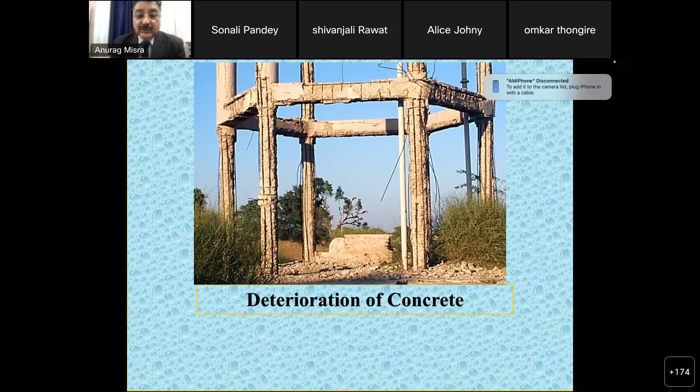We have not been able to attend to that, and that is the reason for the early deterioration of concrete. One more point I would like to highlight is that the examples I showed you here, when they were constructed, obviously there were several things missing, but as per the codal provisions, whatever requirements were prescribed were followed, and the concrete used actually passed the acceptance criteria. So even after passing the acceptance criteria, they deteriorated at an early age.

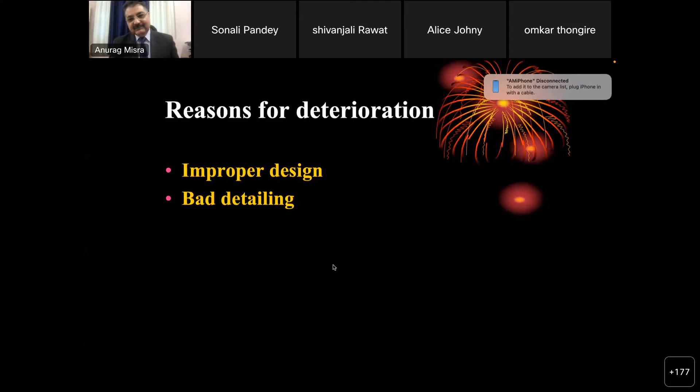So what could the reasons be? There are a few I have listed, and there could be more as well. There could be improper design of the structures, and you can also attribute it to bad detailing. That happens many times, where congestion of reinforcement results in honeycombing, etc., and finally results in early deterioration.

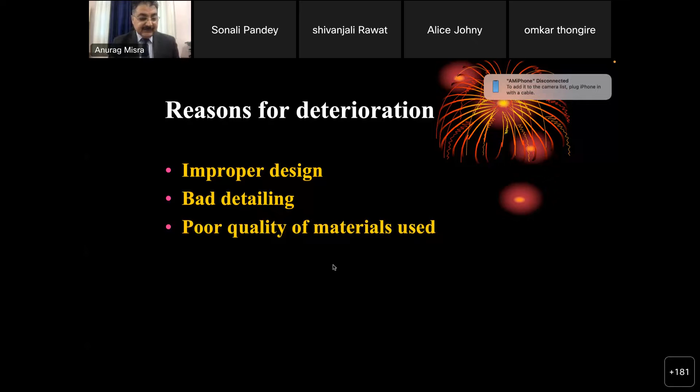Then poor quality of materials used, maybe the cement, fine aggregate and coarse aggregate. Then some bad construction practices followed, not pouring it properly, the transportation being done badly. There could be several of them, and maybe some accidental loading for which the structure was not designed. And the last one is the aggressive environment.

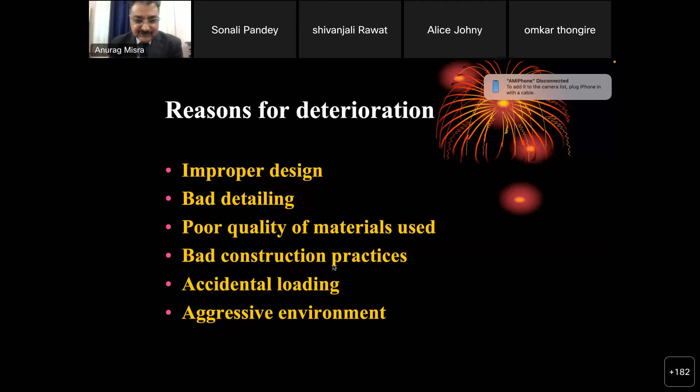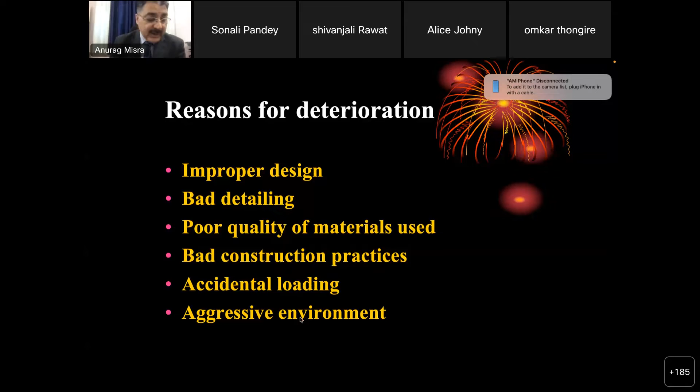I mention aggressive environment because the environment is always attacking the concrete, and there are mechanisms which try deteriorating it. One is reinforcement corrosion, which initiates and results in deterioration of concrete. So out of the several factors mentioned here, mostly we are able to control the top ones, but we will actually be focusing on the main reason for deterioration as aggressive environment, which causes reinforcement corrosion and results in the deterioration of concrete.

So some of them I listed here, because today we are going to discuss the importance of the cover zone concrete, and that is the reason I listed these deterioration mechanisms: chloride ingress, carbonation of concrete, freeze thaw, thermal cracking, shrinkage, and there could be some other mechanisms as well.

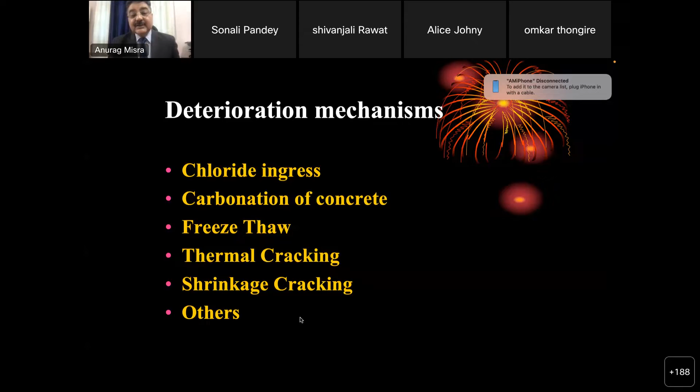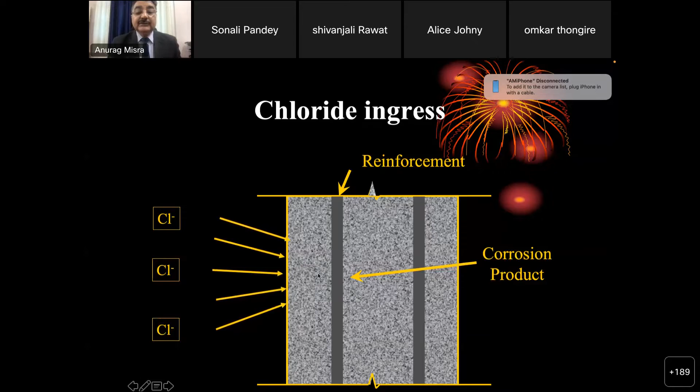So in chloride ingress, if this is a reinforced concrete section, chlorides attack from the cover zone, reach the reinforcement, and corrosion products are formed, and cracking occurs in the cover zone. This means access for chloride ions to reach the reinforcement becomes easier, more of them reach it, and further the spalling of concrete starts.

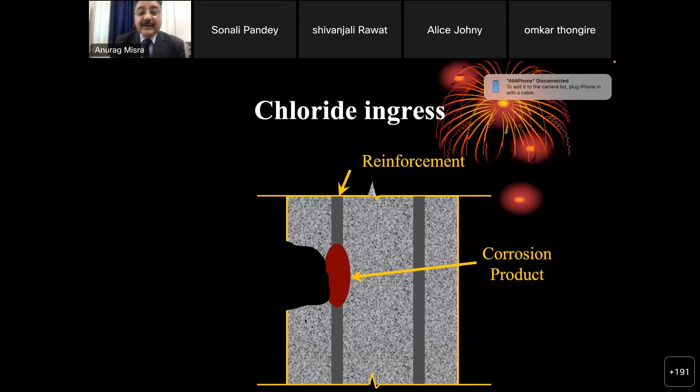So we can see that this area of concrete is mainly responsible for the corrosion of reinforcement, which is a cover of about 40-50 mm, and mainly its permeation properties are responsible for bringing outside harmful agents inside and to the reinforcement, causing corrosion.

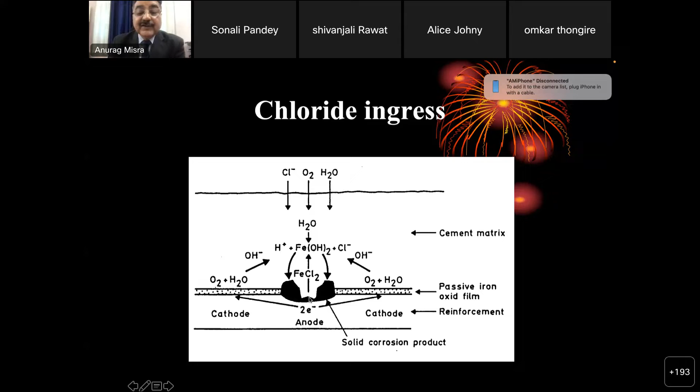This is a diagram showing the corrosion process, where chlorides come in, anodic and cathodic regions are formed, and corrosion of reinforcement starts from the cement matrix. Here chlorides, carbon dioxide, oxygen and moisture ingress inside and cause corrosion of reinforcement, ultimately resulting in cracking and spalling of concrete.

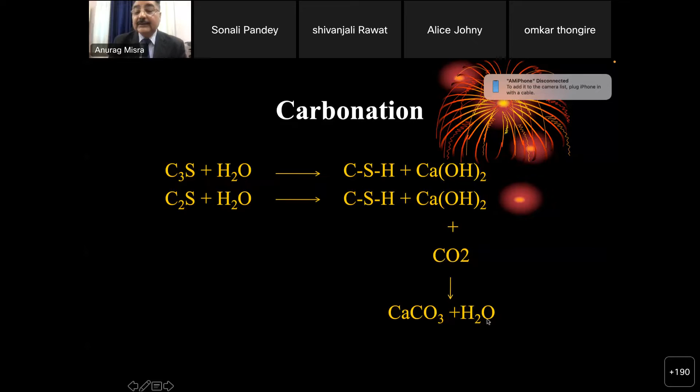The second mechanism I mentioned is carbonation, which occurs when cement is hydrating. In addition to calcium silicate hydrate, calcium hydroxide forms, which when attacked by carbon dioxide from the atmosphere forms CaCO3, and this has also a tendency of leaching out.

So when it is leaching out, it leaves more pores, and there is a mechanism similar to what you saw for chloride ingress: carbon dioxide reaches the surface of the concrete and carbonates it. This carbonation happens layer by layer from the cover, and as time progresses, more carbon dioxide diffuses in with the air, and the carbonation front starts moving towards the reinforcement. As long as it is not reaching the reinforcement, the reinforcement is protected, but as it reaches the reinforcement, the protective passive layer is lost because of the loss of pH, and corrosion can start.

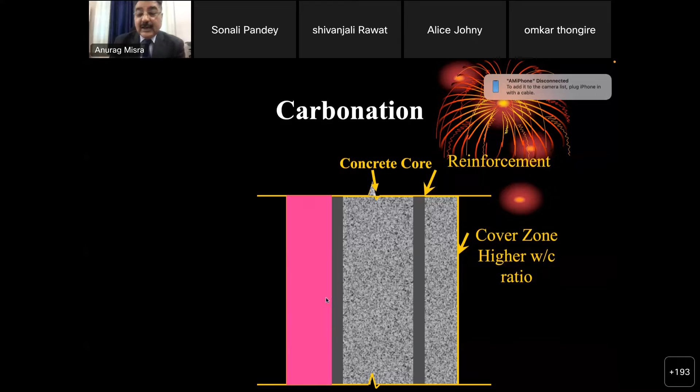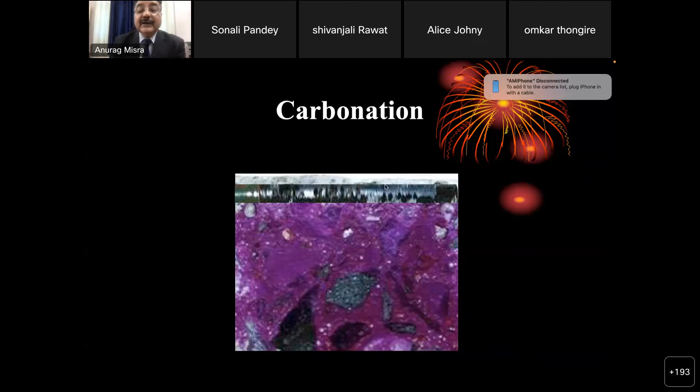You can see here the phenolphthalein spray test showing that this part is not carbonated, whereas the outside is completely carbonated, and corrosion has started. This is how we do the phenolphthalein test: we took a sample, and if you spray phenolphthalein, you are able to gauge how much carbonation of concrete has happened.

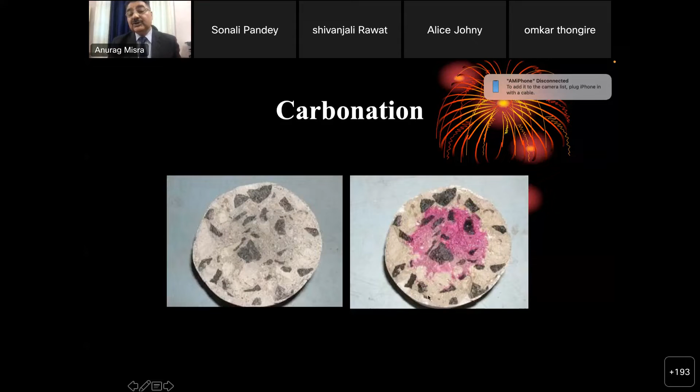As we know, this is a pictorial depiction of the corrosion products formed. You can see that the different forms have different volumes, and the total volume goes quite high, which is responsible for exerting pressure on the cover zone concrete. Since it is very thin, it is unable to sustain this pressure, and it starts cracking and spalling begins.

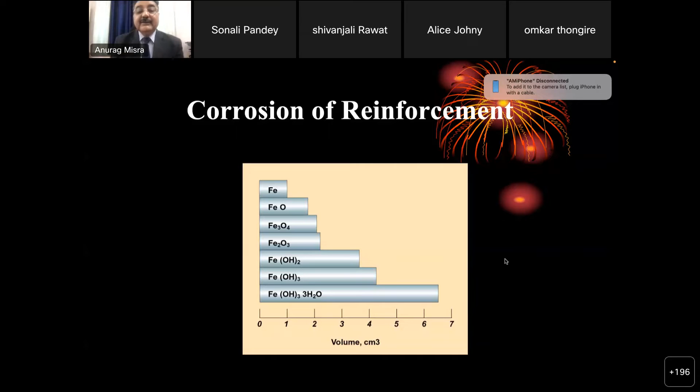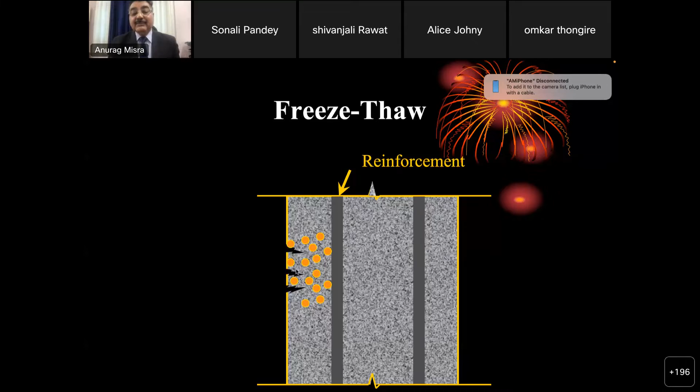Then the freeze-thaw effect is also mainly contributed to the cover zone, where because of the water moisture present inside it, when it freezes, it exerts pressure on the outer surface and causes some cracks. So more water can be trapped in, and in the next freeze-thaw cycle, which gets repeated, more cracking happens, and ultimately the breaking or deterioration of concrete happens in the cover zone, and that is supplemented with the corrosion of reinforcement.

So if we just try reviewing it, these are a few of the deterioration mechanisms we just had. What is mainly responsible? The cover zone permeation properties, which are mainly responsible for bringing harmful things inside the concrete and to the reinforcement, and then the reinforcement cover. If the cover is insufficient, corrosion could start at an early age.

Then the hydration process of cement, because the type of cement we are using, if the hydration gives a porous framework, then the permeation properties would be higher, and it will get more permeability, diffusion and absorption. The more harmful agents will be able to reach the reinforcement and cause the deterioration of concrete.

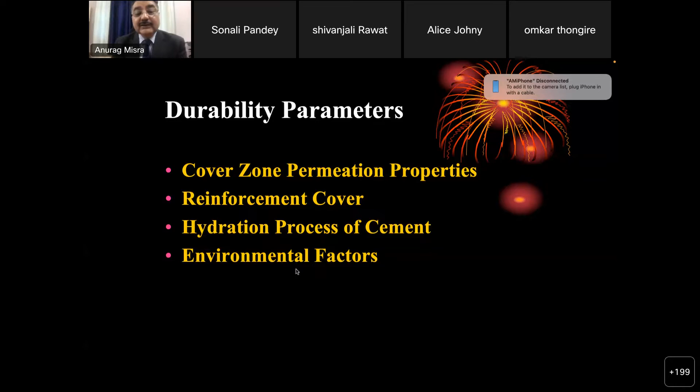Also the environmental factors. The codes have tried incorporating this by taking different types of exposure conditions. In a harsher environment, this process may be sped up. So what I'm trying to say is that all these deterioration mechanisms are happening through this cover zone.

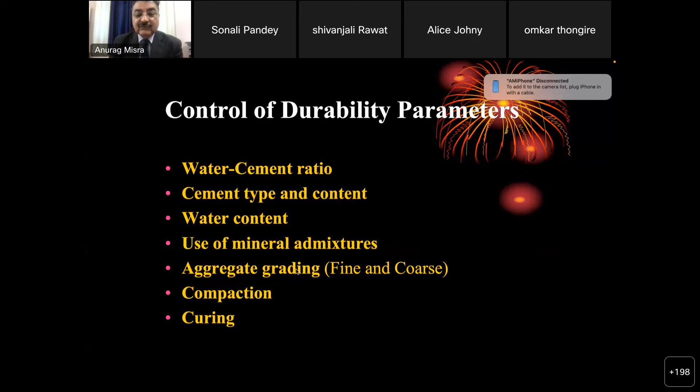So how do we control these durability parameters? Some of them are listed here: water cement ratio, cement type and content, total water content of the concrete, use of mineral admixtures, aggregate grading and type, and giving proper compaction and curing. The purpose of all these controlling parameters is to reduce the permeation properties of concrete, so harmful agencies would not find easy access to enter into the concrete and reach the reinforcement.

So we are taking some measures by specifying minimum grade of concrete for different exposure conditions. Minimum cement content should be there from durability considerations. Nowadays, maximum cement content is also specified. Otherwise, there is thermal cracking inside the concrete, which again causes problems for the durability of concrete.

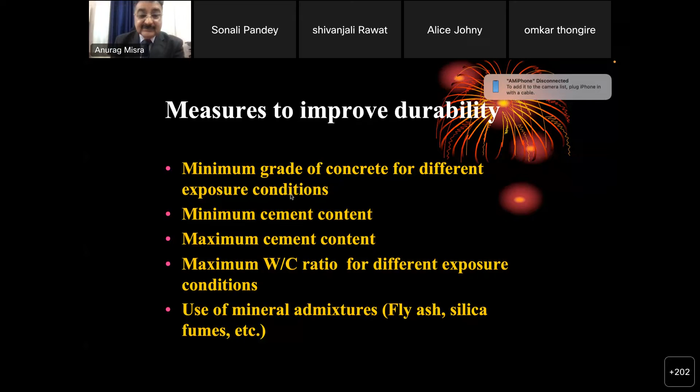Similarly, maximum water cement ratios are specified for different grades, for different exposure conditions, and the use of mineral admixtures like fly ash, silica fume, etc. So some of these measures are prescribed.

But the restrictive measures are there. We are mainly using cube strength as the acceptance criteria, and at least in Indian standards, performance-based specifications are not implemented completely, although these days many contracts have started putting their own conditions which are performance based, which is a very good sign, and the quantitative assessment of performance indicators is still not suggested.

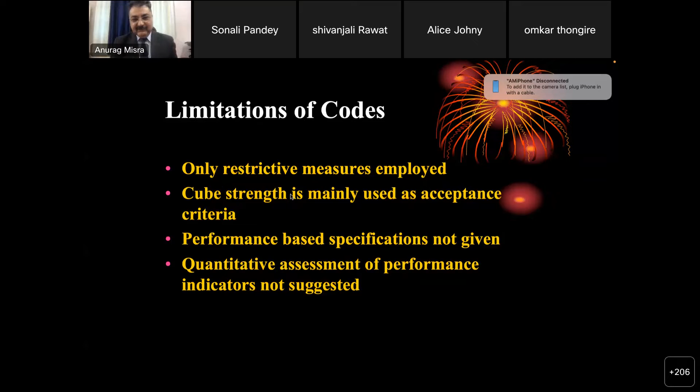So this becomes very important, that we control the cover zone concrete by applying different methodologies, so that the durability of concrete is achieved. So how do we improve that? As I mentioned in the previous slide, a low water cement ratio ensures that the porosity of concrete is less, and lesser pores give a more impermeable concrete in the cover zone, and the concrete behavior for long-term durability becomes better.

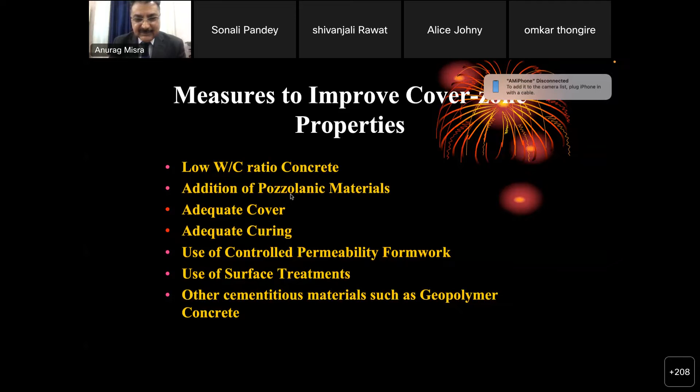The addition of pozzolanic material, we have been using this and trying to reduce the permeability. Adequate cover, curing, and use of controlled permeability formwork, some surface treatment, and we are using other cementitious materials also. There are several, which I would not like to discuss today, like geopolymer concrete. There are different MgO based cements. There are different cementitious materials being tried to tackle this problem.

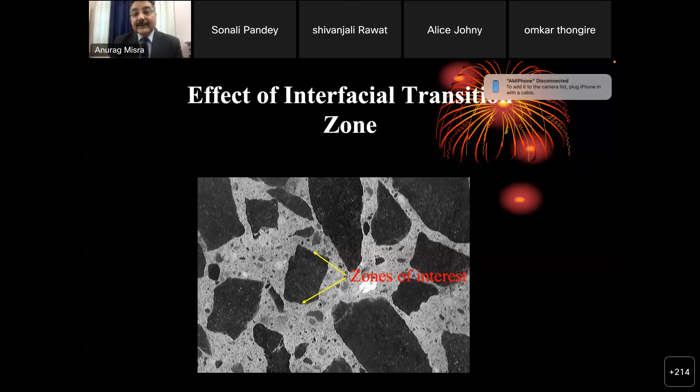This interfacial transition zone has also a great effect on durability, especially when it comes to the cover zone properties of concrete. So let's assume that there is an aggregate, and this is the cement paste. It has been observed that if we are unable to control a few parameters, this area, which is shown here in yellow color...

...which we call the interfacial transition zone, comes out to be more porous as compared to the main matrix. So the attempt has to be that we try controlling, for a particular mix, the parameters which are able to make this transition zone more compact and more uniform as the remaining cement matrix.

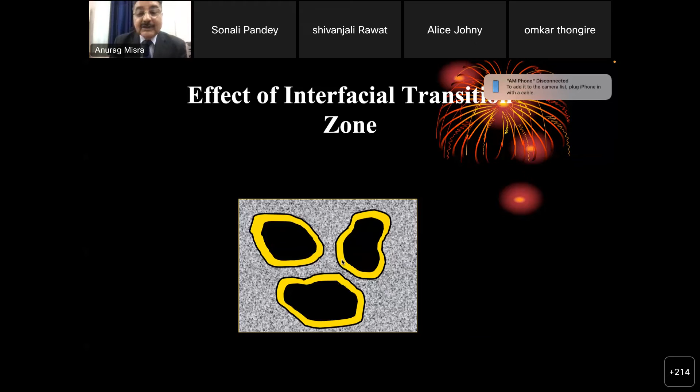So a more porous structure is formed near the aggregate, and that is responsible for increasing the permeability, diffusion and absorption properties of concrete, which ultimately results in the early deterioration of these structures.

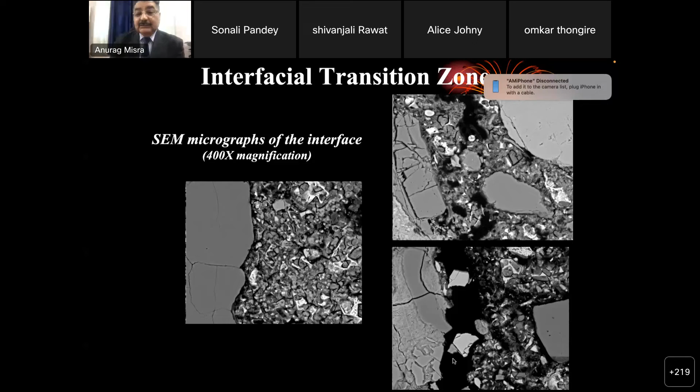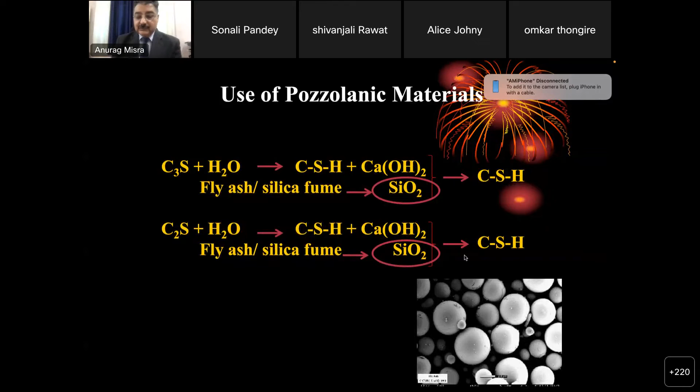We should try improving this, and it has been observed that if we use silica fume or fly ash, the calcium hydroxide, which is a byproduct, gets consumed, and CSH is formed. So in a way, it is giving a more compact framework of the matrix, and the properties are reasonably improved, and we get better durable concrete.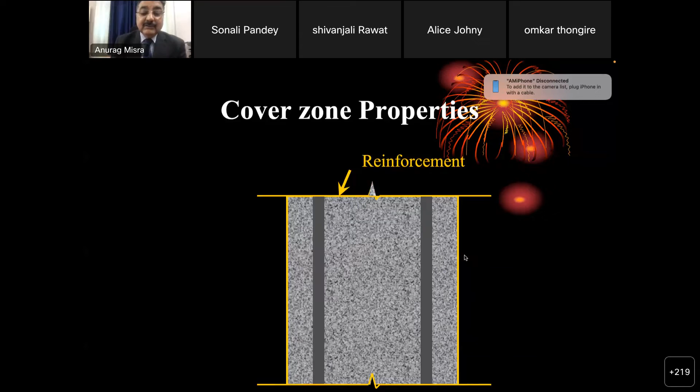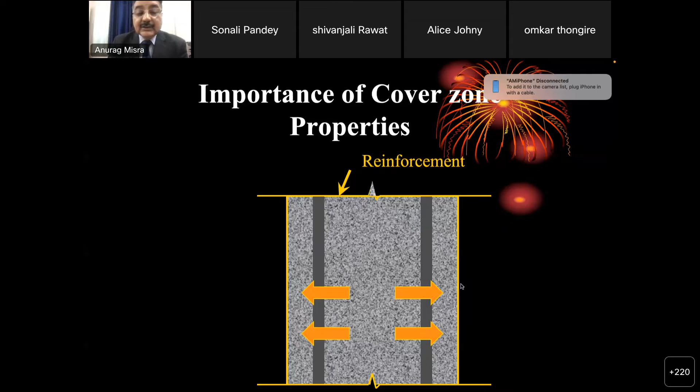Also, in a reinforced concrete structure, when we are vibrating the concrete, there is a tendency for water to try expelling towards the outer boundaries. The air, being very light, comes up, and also some of the water tries flowing towards the outer boundaries. In the process of vibration, more water gets accumulated in the outer cover zone, as you can see here.

So the effective water cement ratio, if we observed, is popularly depicted something like this: the water cement ratio in the outer cover zone becomes quite high as compared to the lower one. So suppose someone used 0.45 water cement ratio and vibrated the concrete, during the vibration more water is trapped here in the cover zone.

So the effective water cement ratio becomes quite high here, and some of the water is going from this mass core concrete outside, so it might be slightly lesser than what you use, because more water is accumulated here. So in this small region being moved, the water gets a higher water cement ratio, which obviously results in lower quality, or lower compressive strength.

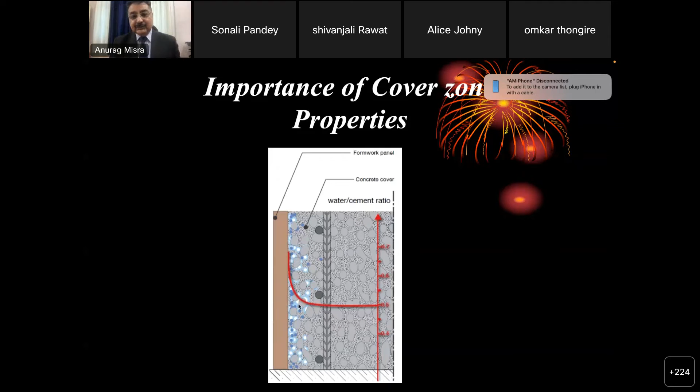Also, because of the presence of more water, or more water cement ratio, the permeability of this region becomes very high. That is the reason we normally say that total water content should also be controlled when we are proportioning our mixes, rather than just balancing the water cement ratio. So that results in, because this area becomes quite porous, a bad quality structure where early deterioration is expected. We need to look for these things and try controlling that.

So again, I emphasize that this area needs to be looked at, and to reduce that, these days some formwork liners are coming, which could be taken up for making the cover zone properties better. These liners are placed near the inner surface of the formwork.

So when you do the vibration, the same process happens. The water tries to expel out to this cover zone concrete, and these liners have some very small channels, and a membrane which allows the water to flow out but will not allow the cement particles to go out. So this liner, if used, is one of the mechanisms by which we can reduce the effective water cement ratio being obtained in the outer cover zone concrete.

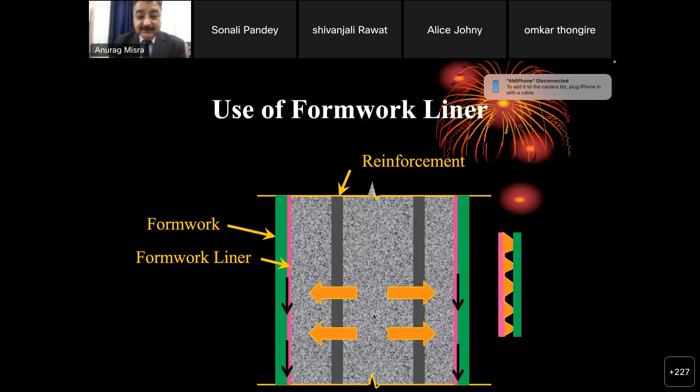Also, these days surface treatments are becoming popular, where we apply some silane based or acrylic based surface treatments. These are basically plugging the pores in the cover zone concrete, so the access of chlorides, carbon dioxide, oxygen, moisture, etc. gets greatly reduced, thereby increasing the durability of concrete.

I would suggest that these are not the measures for concrete. The first thing is that we should try making good concrete which satisfies our requirements, and these methods, especially the surface treatments being expensive ones, should be employed wherever things are going wrong.

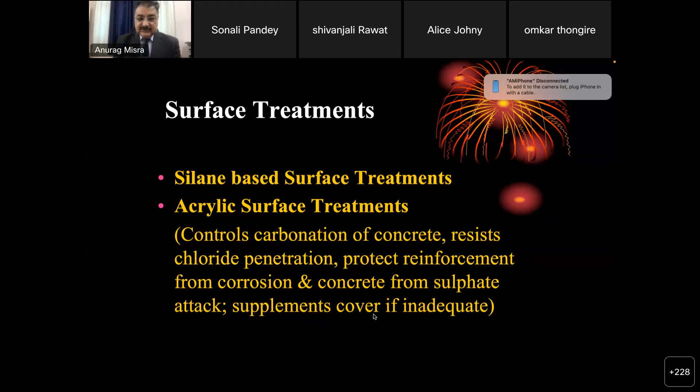So once we say that a prescription is given for using a certain grade of concrete, M35 or M40, and if we are able to assess the required permeability for the life of the structure, and that is not being achieved in some cases, then in those cases we can resort to applying these surface treatments, and can improve the quality, delay the deterioration of concrete, or improve the durability of concrete. So these are some of the things we apply, and then we move on to when I'm saying that we improve the cover zone concrete.

So how do we assess that after the construction, how the cover zone concrete has actually been made? We will discuss briefly some of the assessment methodologies for assessing the cover zone concrete. Some of them could be in situ, some in the laboratory. I'll briefly go through tests like pull-off test, initial surface absorption test, water penetration test, water and air permeability, and an in situ ion migration test also. Many of these I'll discuss later on.

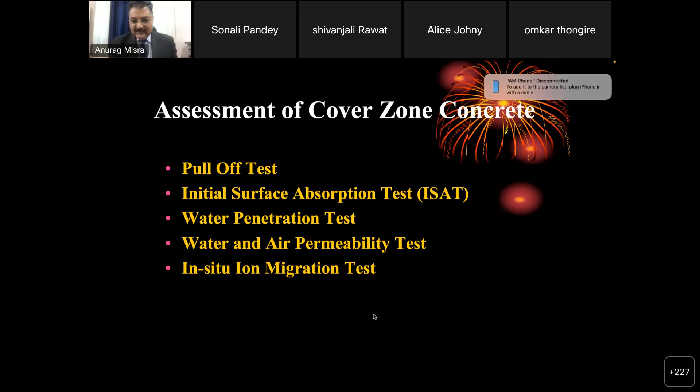We move on. The pull-off testing is very simple, and I would say semi-destructive also. If you are using a surface test, prepare the surface of the concrete, a disc is normally attached with epoxy glue, and the equipment applies a tensile force for failure, and the pull-off tensile strength is calculated. In some cases, we can drill partial cores also.

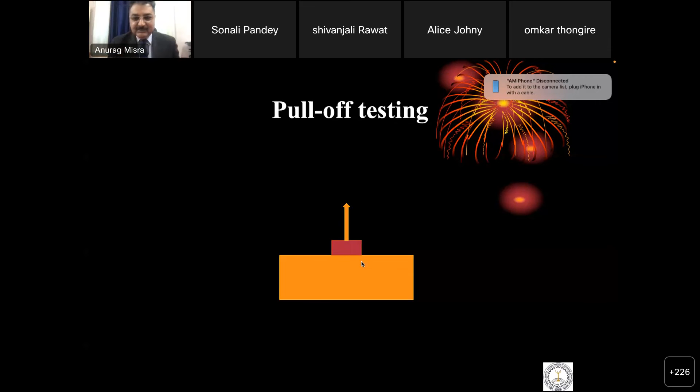The point of application of the tensile force is defined, and you can calculate the tensile strength of concrete, which predicts the real tensile strength of the cover zone concrete, because this test is performed on the surface. There are some more tests of the type where you insert something, which create a bit more destruction than this test. When doing this test, we have to be careful, because surface preparation plays an important role, and the destruction in this case is reasonably smaller.

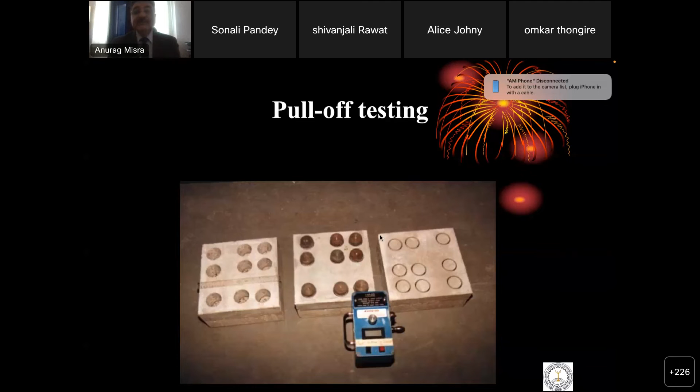You can use this pull-off testing apparatus, where the testing is done by drilling partial cores, the small cores of about 10 to 15 mm depth. They come out, and you can get the pull-off strength of the concrete in the cover zone.

This is another test, the initial surface absorption test, specified in BS code. This is again a surface test where you can see the surface absorption of the concrete. It gives you a hint on one of the parameters of the permeation properties, that is absorption, by applying a water head of 200 mm on the concrete surface. Either we can do that on specially prepared cubes of the same concrete, or this could be deployed at site also, but it's quite difficult. It's not very easy to deploy at site in all situations.

So this is one where you could get the absorption parameters in a 10 minute, 30 minute test. But that will tell you how the surface is able to absorb the water. That means there are pores, and it is indicating how porous the cover zone concrete is.

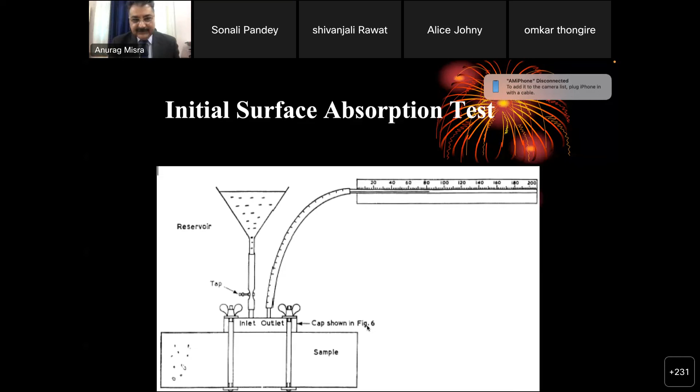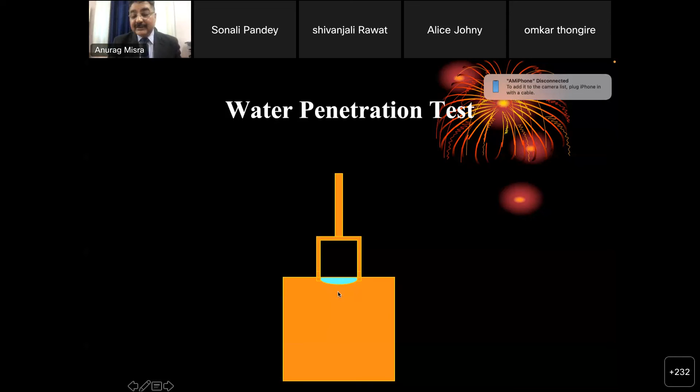This is also a very popular test being deployed because it's easy to perform, and at site it is being used quite regularly now. I have seen at sites many people keeping in their contract documents that this water penetration test has to be performed alongside the compressive strength test, where we have a cube sample alongside the compressive strength test cubes. A cavity is filled with water and kept under pressure, so water starts penetrating into the cube, and after the complete test time, the cube is split and the depth of water penetration is measured.

Although this test is not depicting the actual cover zone properties at site, because that is a laboratory test, it can say in a way whatever mix design we have done, what the properties of the surface concrete would be if prepared in the lab, and expecting similar results at site. So it's like the cube test we also do in the laboratory, and expect that similar strength is going to be achieved at site.

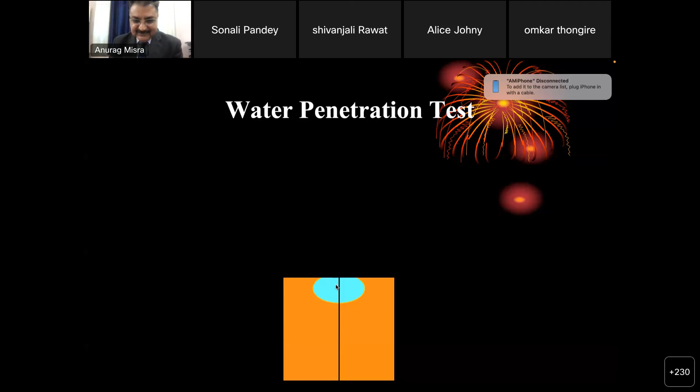So in many contracts we keep the restrictive criteria that the water penetration should not be more than, let's say, 10 mm for the concrete to be accepted. In several places this is used as an acceptance criteria as well, which, if not exactly an in situ test of the cover zone concrete, gives you an idea of the concrete on the surface. That's how we perform this. We fabricated in our lab the setup where you could put these cubes under pressure, and the water pressure is maintained before you test.

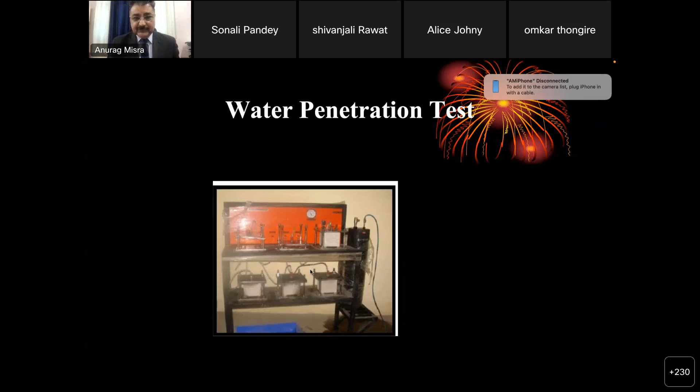Then we can employ some permeability tests also. There are several such tests developed across the world, and people are using them. I'm just discussing one of them: this air permeability test is basically where you have a cavity created on top of the concrete surface. The equipment is fixed here, which has a cavity, and you apply air pressure here. So the air tries to diffuse through the concrete. Obviously these surfaces have to be sealed.

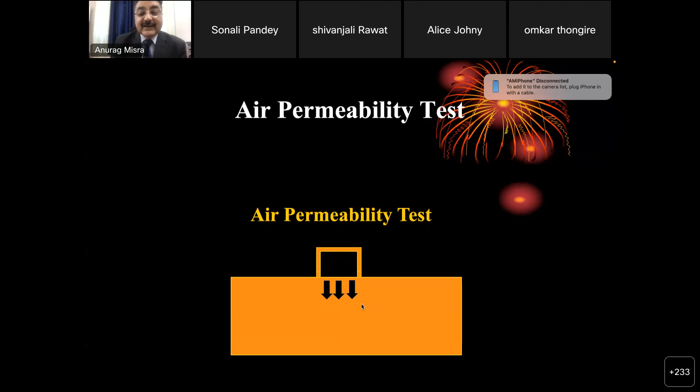So this air which is diffusing through the concrete surface means the pressure is going to drop. Once a pressure of, let's say, 500 millibar is kept, and then you leave it, the pressure starts to dissipate, which is measured every minute for 15 minutes. Then we plot a graph of log of the pressure versus time, and you get a curve, and the slope of the curve is taken as the permeability index. So it is not actually the intrinsic permeability, but it is giving you an index. If the concrete has a more porous structure in the cover zone, more pressure drop is available, and that is an indicator of more permeability of concrete.

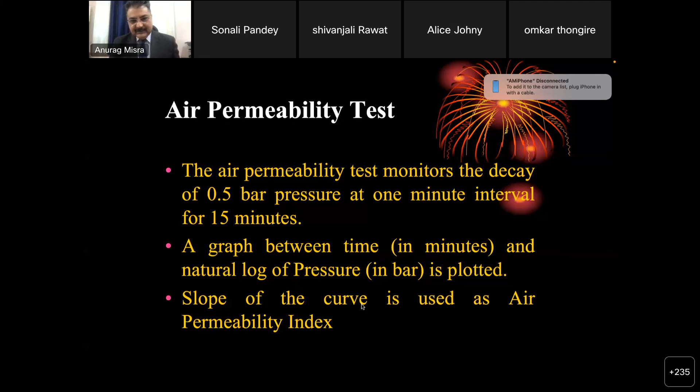So that is how we can calculate the permeability of concrete, and then we can also calculate the water permeability. The same way, you fill the cavity with water and apply pressure, which tries to push the water into it, and the water going through the concrete is measured every minute. Again a curve is plotted between the water going in and the square root of time, and the slope is taken as the water permeability index. So these are the indirect ways of calculating the permeability of concrete. It is not, again I say, an intrinsic permeability of the concrete, because those tests take too long and are normally not practical at site.

So this is one. There are a few more methodologies also of a similar type being used at several places, where you can get an idea of the permeability in the cover zone of concrete. If we take a disc kind of sample, prescribed in the code, and apply pressure to create a steady state kind of situation, that takes too long, and there is literature saying that things are changing. So it is a quicker way of finding an index, if not the same permeability, because it is able to differentiate between two different concretes which have different permeabilities.

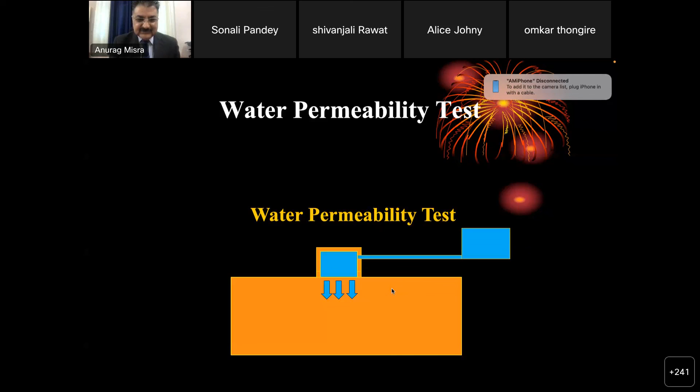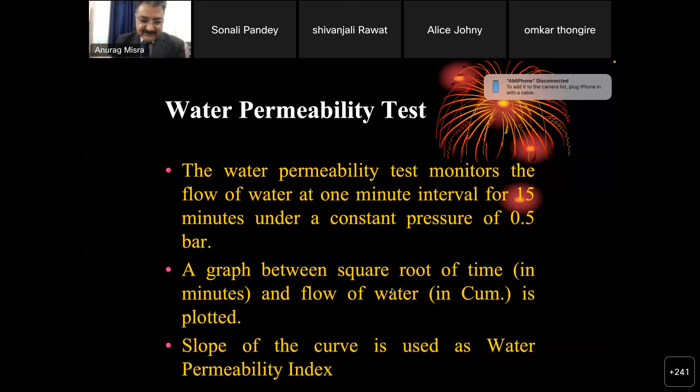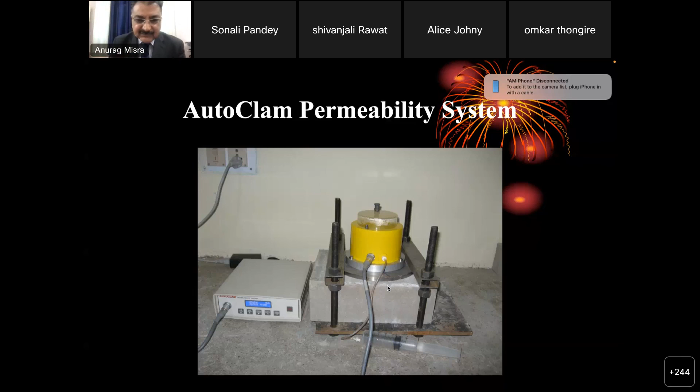This is also able to actually attend to the problem we are facing, that it addresses the water permeability or air permeability of concrete in the cover zone, and we can apply this in situ also. So this graph gives us a permeability index, which we use as a reference indicator for the durability parameter. So the test looks something like this. There are some more tests also being developed right now, using slightly different methodologies. But the idea is that these tests are able to get the permeability of the cover zone of concrete. They are not giving the total concrete permeability, basically an indicator of the cover zone. This could be done on a sample in the laboratory, but it could also be deployed at site, on any slab or column surface, and we can get an idea of the permeability of concrete.

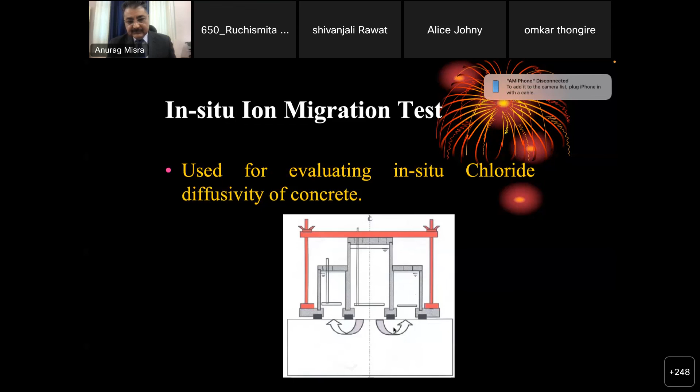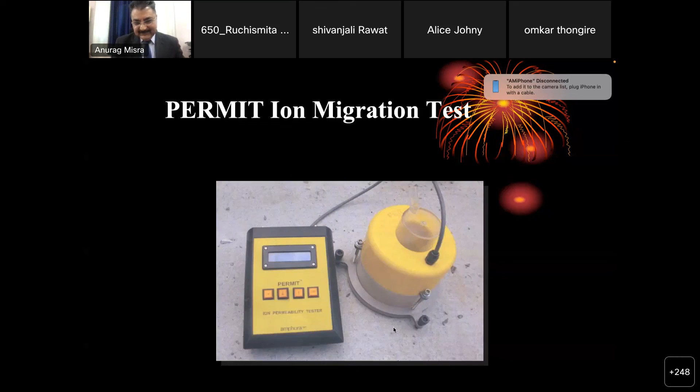Similarly, we can deploy an in-situ migration test as well, where we create a potential difference for a known chloride sample to move through the cover zone concrete, to get an idea of the in-situ chloride migration resistance. The other test we do is RCPT, or maybe chloride diffusion cells. There we get an idea, but normally that is not the idea of the concrete diffusivity through the cover zone concrete. It is basically a concrete disc, normally from the core of concrete, which can sometimes give misleading results compared to the cover zone and the core concrete. This is another type of test which you can put on site and get an idea of chloride migration.

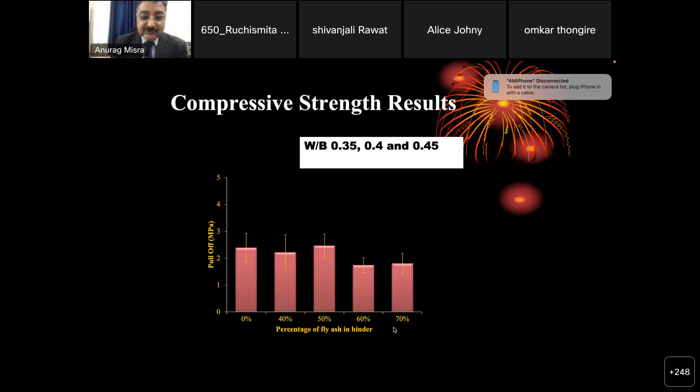So there are some typical results of these pull-off and compressive strength tests. I'm just showing this to give you a flavor of how they can be calculated, and there is a resemblance between the strength and the permeability properties.

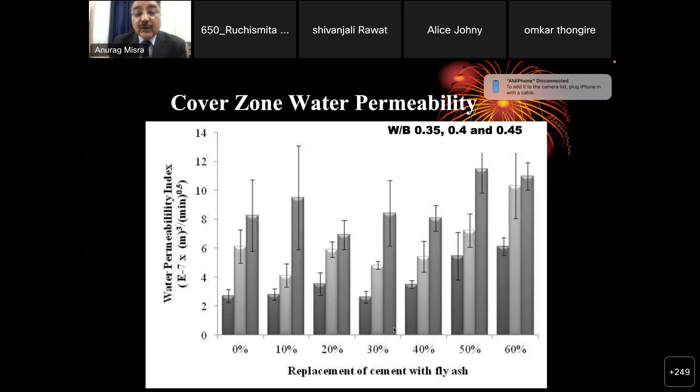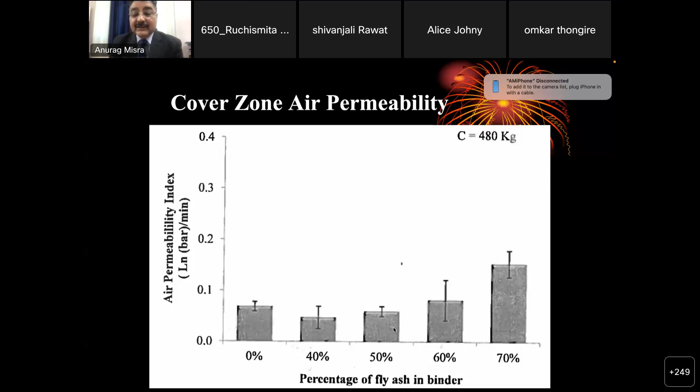Now, which is the most durable one? Obviously we try keeping it minimum. There is lots of literature on this, I don't want to go into detail on what the parameters could be for fixing acceptance criteria. So these are air and water permeability tests performed on site and in the laboratory, and based on that we can make our own acceptance criteria.

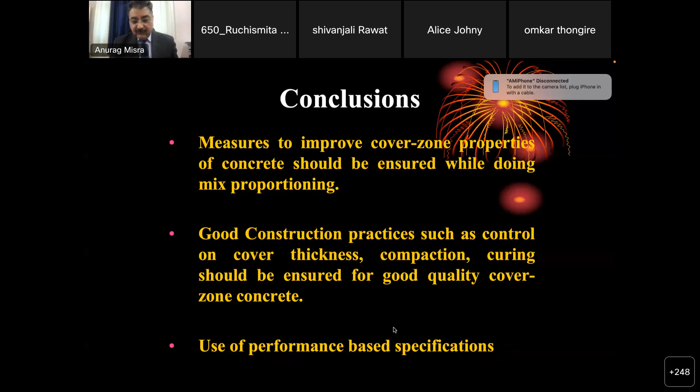So finally, I would conclude by saying that measures to improve cover zone properties should be taken from the very beginning, because there is no substitute to making good concrete. While doing the mix proportioning, we should keep this aspect also in mind while getting to a good strength. Obviously we should follow good construction practices if we want better quality concrete, and I would strongly suggest that we use performance-based specifications for accepting it.